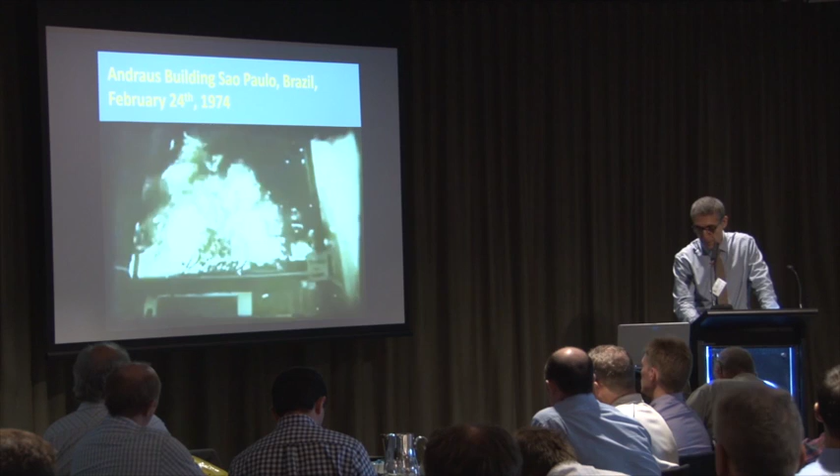So we realized in the 1960s, basically as a function of every fire that actually has a name that happened in that period, that this is something that needed to be avoided. The entire strategy to try to guarantee life safety in tall buildings depends on the fact that fires should be contained to a single floor. If we cannot contain a fire to a single floor, then the entire fire safety strategy collapses. From the pressurization of the stairwells, which is a very complex process as was described before, to the structural integrity, everything depends on the fact that we can contain the fire within one floor. So a scenario of this nature is actually completely unacceptable, because it integrally dismantles the fire safety strategy.

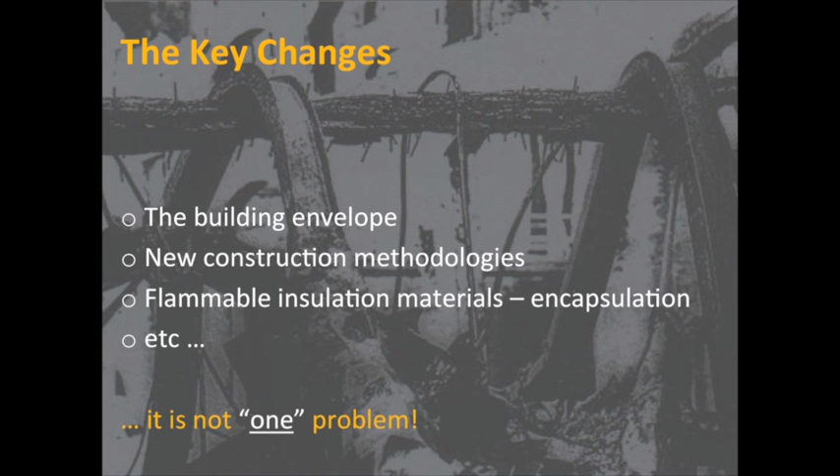So what are the key changes that have brought us into this position? So basically, every time that we've innovated technologically, we're going to introduce risks. Many times those risks are very managed and we understand them very well. But from the inception of modern construction, we've introduced things like what we see in this image.

So basically the introduction of steel into construction resulted in a major problem. The steel actually did not behave as well as timber. So timber became the reference, and we started to try to develop methods to try to make steel as performant as timber. Now, we succeeded at resolving the problem, but that's what it took. We had to study the problem, understood it, and then move on to try to propose solutions.

So what has changed? Basically, our building envelopes have changed dramatically. So we don't have the same type of systems that we had in the 1970s or 1980s. We have introduced all sorts of novel construction methodologies, and we've made all sorts of statements about all this complexity of the structural systems and all the different things that we're putting in place.

Now, we have introduced massive amounts of flammable insulation materials under the name of sustainability or green buildings. So basically, our entire facades are protecting us now from heat transfer. So effectively, we do that by means of the introduction of cellular plastics, and that has forced us to change the paradigm. We're not talking about flammability anymore because the materials are flammable by definition, but we're talking about encapsulation. So we're protecting flammable materials by means of external barriers.

So there's a massive change in paradigm that we really haven't understood very well, and I can keep going, and the list is very long. So there's a number of different things that have happened in the process, and the first thing that we need to recognize is that it's not one problem.

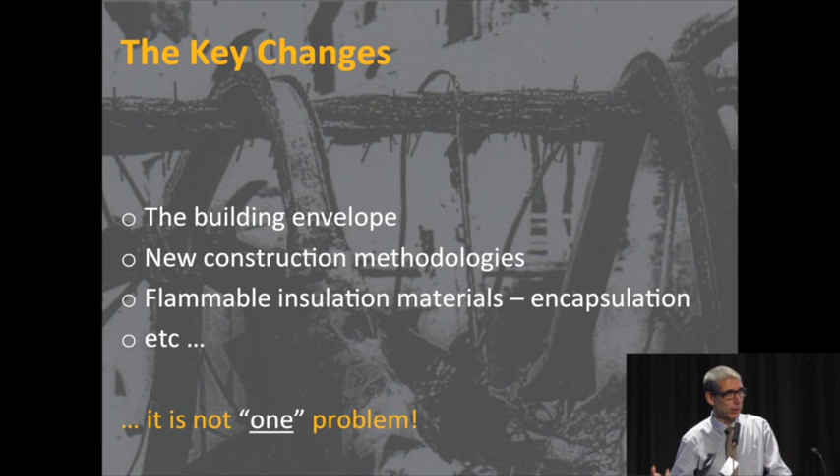All those images that I showed, if you actually analyze the fires, in every single case you get a completely different scenario. So the analysis of these fires shows that what we have is a multiplicity of problems, all embedded in the concept of the modern facade design. So we design facades in a completely different way, and in the process we have introduced a multiplicity of problems, and we cannot box them into one single problem. There's numerous problems that need to be analyzed in great detail.

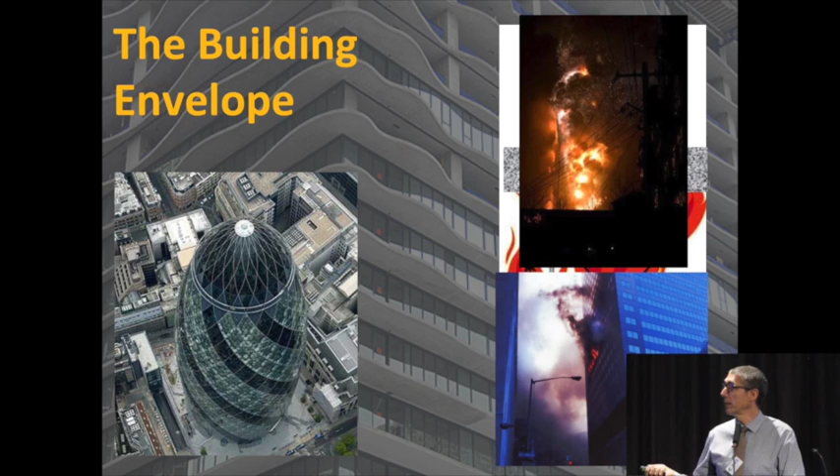So here you have an example of a problem that we have created by transforming components into a system. So now what we have is system behavior, we don't have component behavior. In the past, basically I guarantee geometry, I guarantee flammability by testing components, and I guarantee fire resistance by testing components. Now I need to be able to understand the system in its integrity. And if I don't understand the system behavior, then I won't be able to address this specific problem.

So this is how we went from here, which is a perfectly controlled problem, to here, which is a completely uncontrolled problem. In other words, what we did, we changed the problem.

So the moment that we have a facade of this nature, and I have nothing against Norman Foster, by the way, but I like his buildings, so I put them always as examples. And this is what you're creating. So what you have is a structure that is heavyweight, that is going to heat up very slowly, and it's going to deform in a very peculiar way. That's the concrete slab. Then you have a lightweight system that is going to deform in a completely different way, and then you have a connecting point.

That connecting point is going to result in, basically, in the presence of a fire, we're going to try to block this by introducing some sort of a barrier. But the truth of the matter is that if I put a fire, what I get is relative displacement. So this is going to rotate in a certain way due to temperature gradients that are produced in the concrete slab. This is going to rotate in a completely different way because it's going to be restrained thermal expansion due to simply dilatation of the steel or whatever the material is. And the result is that you get two systems that are displacing themselves in a completely different way. The result is the production of a gap.

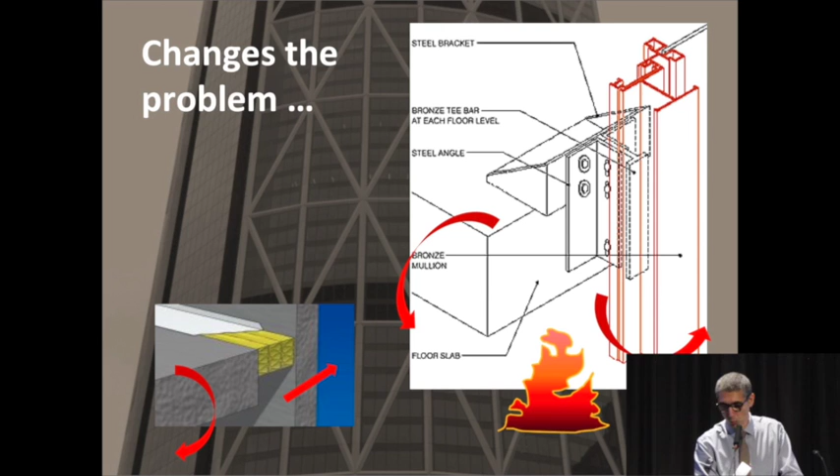Now, how do I fix that problem? Okay, and this is not the way in which we fix the problem. Now, detailing becomes very important. Detailing, quality of workmanship becomes very important, but also integrated design becomes very important because it's now the structure plus the facade that matter. Now, if you look at this picture here, this picture is one of those pictures of a problem that cannot be solved. You have the two connecting elements, you have the very lightweight system, you have the concrete slab, and the concrete slab lands on the glass. So how are you going to fix that problem? Once you created that system, then you cannot fix it anymore.

Now, how did we land in that position? The facade designer designed the facade, the structural engineer designed the structure, and nobody worked on the system as an integrity. Then we tried to fix it by filling the holes with whatever we want, but there is no way you can guarantee continuity when you have that type of a system. So filling the opening is really not the solution because relative displacement will never allow to fill that opening. So effectively, because of poor construction detailing, we have created a problem that cannot be fixed, and this gap can never be resolved.

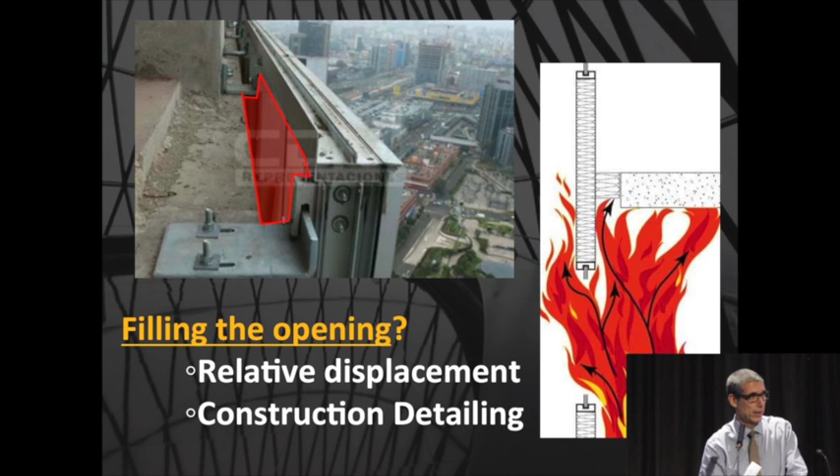So at the end of the day, what we're talking about is complex building systems. We're not talking about components. And if we don't really understand these complex building systems, we are going to be always in the situation where we cannot fix the problem. Now, the complex building systems introduce an enormous amount of detailing. So we have all sorts of different components that go into the systems, and they're getting more and more complicated because we're putting more and more demands on the systems. Now, the complex building systems are multi-purpose. We want them for energy conservation, stability, durability, comfort, life cycle, you name it. We've created all sorts of different requirements for those systems.

Now, those systems are going to be more and more dependent on labor skill and on cost. There's a lot of tolerance issues, installation issues, times, because we want them fast. They all have to come up really, really rapidly. We have all sorts of modifications that are done during construction, and all these things are affecting the performance of the system itself. None of these things were taken into consideration. The objective at the end is to guarantee that encapsulation. This is the problem that needs to be solved, because we are putting flammable materials in the systems, and therefore we need to encapsulate it.

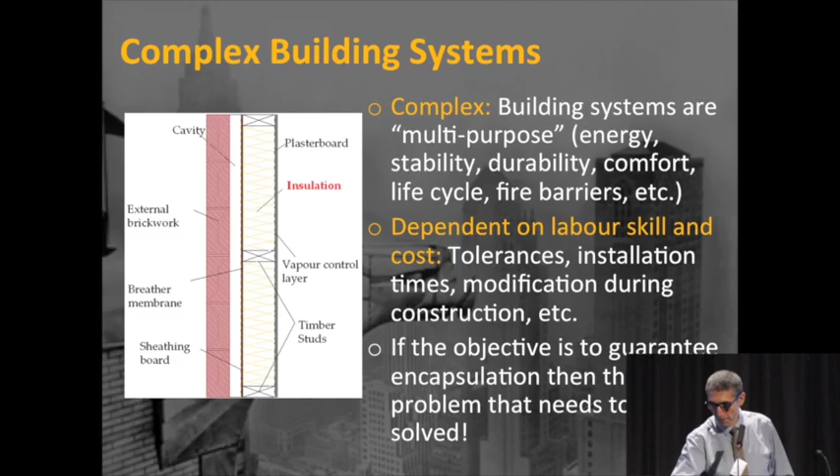So let me give you the example of the kinds of things that we are encapsulating and the kinds of problems that we're generating. So if you look at these two images here, I'm going to show you two videos. One of them is the typical two aluminum plates with polyethylene in the middle. That's everywhere. So today we have all these facade systems that have these two aluminum plates, and you have a plastic in between. Okay, why do we put the plastic? For a number of different reasons, from minimizing vibrations to insulation issues.

So now, what happens when we start heating this up? What is the failure mode? The failure mode is the two aluminum plates, and then you have in the middle this plastic, and as you start heating up, you're going to realize that the way this fails is not because you're igniting the plastic, but because the adhesive between the two of them fails, and then it splits.

So the moment that you have thermal expansion of the aluminum plate in the front, and that it cannot be absorbed by the cold back, then you get relative displacements, the adhesive fails, then you get a split. The moment that the split happens, what ends up happening is that then it starts gasifying, and then the result is that it ignites. Now, it's going to take a little while.

You can see how it's beginning to split now here, and the moment it starts splitting, you can see the smoke being produced, and then all of a sudden, you get the ignition of the material. You see how it's splitting? So once the material ignites, then it just goes. Now the concept of preventing upward flame spread disappears completely, and all of a sudden you have flames that are coming up from the outside.

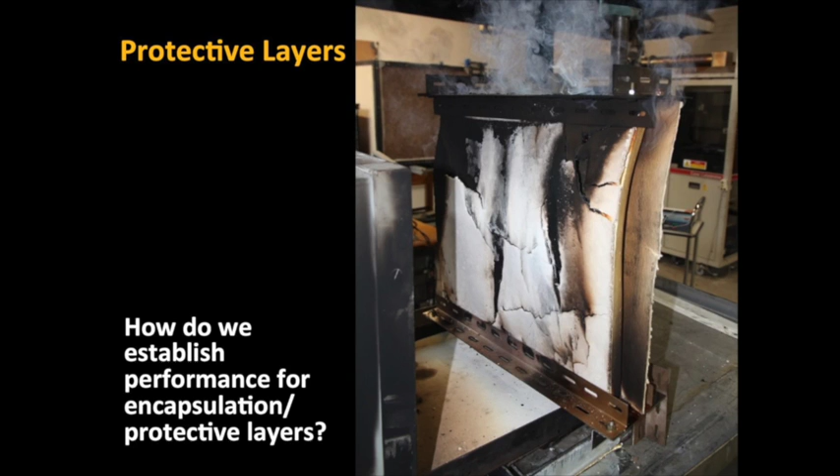Now, as you can see, we've created all these problems, and we understand what the problems are. We encapsulated these materials because we know they are flammable. There's no way to circumvent them. That's why we encapsulate them. So we've created systems that are quite complex in nature, and to be able to fix the problem, you need to be able to test the problem that you're trying to solve. Instead, what are we doing? All over the world, we have flammability tests. So all our materials that go into facade designs have to meet these flammability requirements.

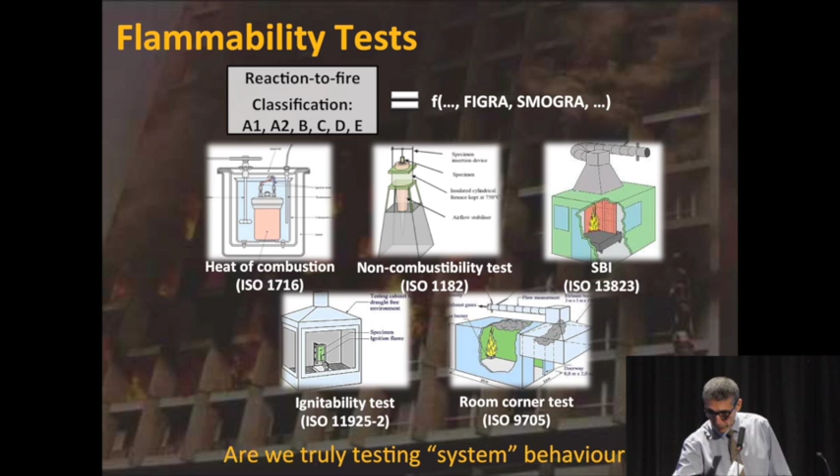Needless to say, if I utilize EPS, or I utilize polyurethane, or I'm going to use, for example, polyethylene, they're going to fail. That's why I encapsulate them. So why am I testing them for flammability, if at the end of the day I know they're going to burn? Nevertheless, that's what we do. So we comfort ourselves and feel very happy because we've tested them for flammability. Okay? Then some people are a little bit more progressive, and they move along and they say, well, let's do fire resistance.

Fire resistance is to test the resistance of a non-flammable material to the impingement of a flame to establish a barrier. These things are not a barrier. So then we say, oh, let's just require fire resistance ratings. Let's put FRLs. And we test them against fire resistance. Needless to say, they're going to fail. They're not designed for it. So then we say, oh, well, no, let's just not do fire resistance anymore. Let's move somewhere else. Okay, and then we go to other different things.

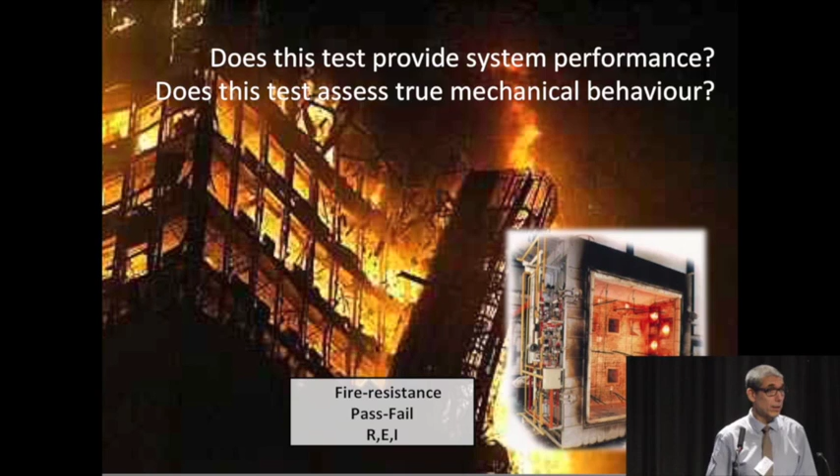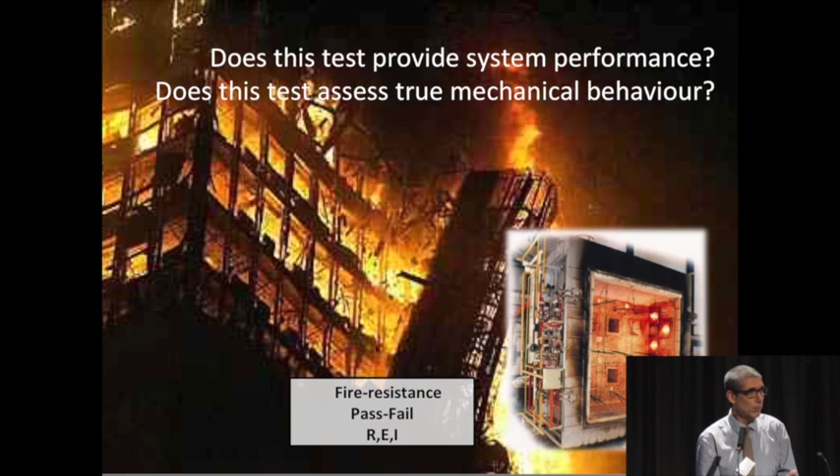Because these tests, we realize, are not there to test the system performance. They're not there to test mechanical behavior. They're there to test a barrier. Now, when we had a concrete slab that served as a barrier, that made sense. But now that we have a connecting point and we have a complex system, it doesn't make sense anymore. Nevertheless, we keep doing it. Now, when we finally realize that none of these things work, then we say, let's do scenario tests. So do we test for fire for one fire condition?

There you go, one fire condition. Do we test for fire without putting any instrumentation? There you go, no instrumentation. But we're happy now because we're testing against one scenario. If I'm a manufacturer of a facade system, I'll be very happy because I have a very easy target. Does that fix the problem? Not really. So that's what we're doing today.

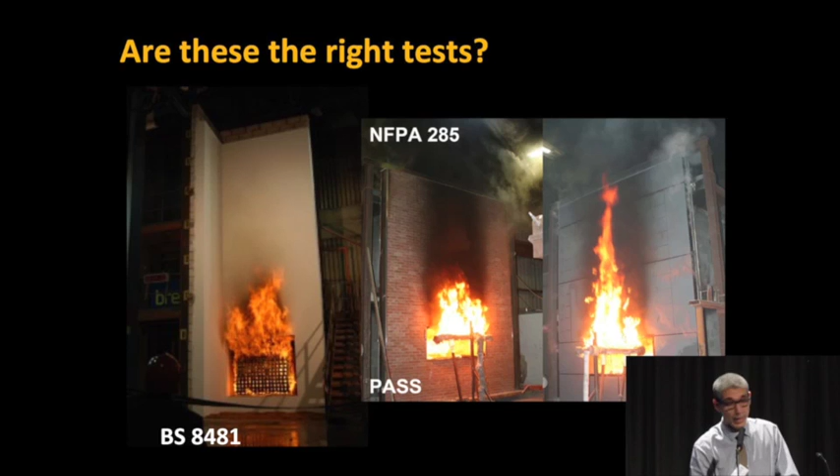We have all these tests, but we never ask ourselves the question if these are the right tests. And the problem is that nowadays, we started here and we've lost this completely. So we have to start thinking on what is the solution. Now, the problem is that the solution is truly adequate testing. And adequate testing, we do know how to do it. We know it perfectly well. Okay? So we know exactly what needs to be done, but it requires bespoke testing that is basically for each particular system. It's not a standard test.

Each system is a system of multiple components that requires a testing methodology that is directed to solve the problem, just like you do with a wind tunnel. Okay? But we're not willing to do it when it comes to fire because we're not willing to address the system behavior. We want a standard test. We want something that is good for flammability, that is good for fire resistance, but is not good for a system behavior. Okay? So at the end, we need to be able to address building plus envelope, and that requires bespoke testing for each particular system.

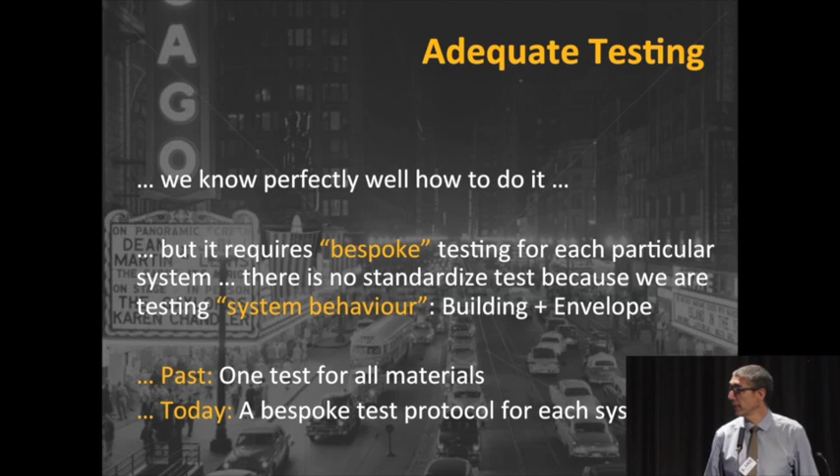So we need a testing methodology. So if we really think about it, the past is one test for all materials. What we want is a bespoke methodology for each system. Okay? That is going to cost more? Of course it's going to cost more. But if what you really need to do is fix the problem, then that's what is necessary. So today, this is what we need, bespoke test protocol for each system.

Now, at the end, let me ask you the question. So if you want to use encapsulated EPS, do we know how to fix the problem? Yes, we do. But it really takes a lot of effort. Because the problem with EPS is that EPS melts at a very low temperature, so it starts retracting. So your protective layer loses its structural integrity because it has no support. Okay? So we need to design in a way such that we prevent that melting.

Now for that we need to try to understand the different forms of EPS and see at what temperature it degrades in such a way that I understand how to prevent that from happening. Then I need to provide systematic testing by which I expose the different types of barriers to an array of different conditions, not a single scenario test. Once I understood this, then I can start looking into the potential fire scenarios and see where is the match, and then reproduce with large-scale testing those scenarios until I actually get what I want. Those tests have to be properly instrumented, and they will serve as validation for the whole methodology.

So, can it be done? Of course it can be done, but it takes a lot of effort to do it. Now, the question is, if we want EPS encapsulated in our facades, then yes, we can do it, but this is how far we have to go. Now, if you want to ignore that and just basically use EPS without really thinking about it, then we're going to continue to have these facade fires inevitably. There's no way to prevent it.

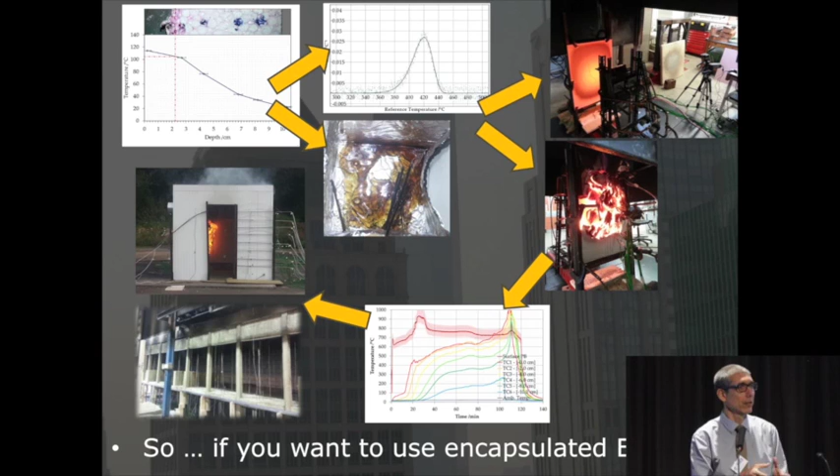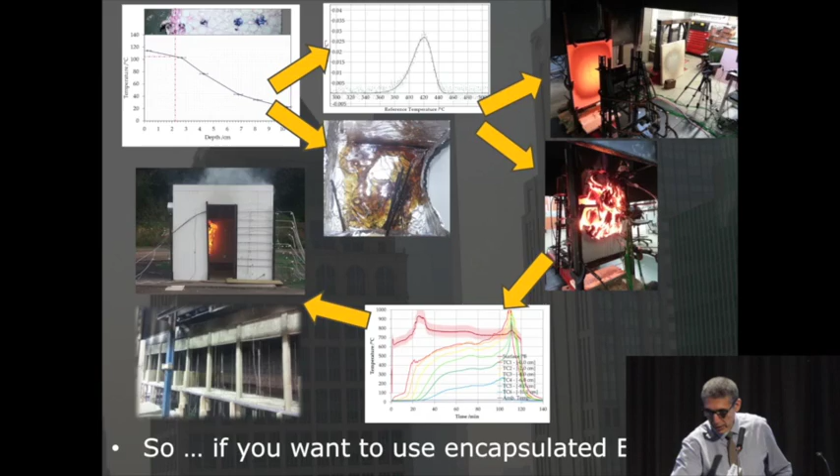Okay? So, do we know how to do it? Yes, we do. Okay? We have the methods, we have the understanding, we have the instrumentation, we know exactly what needs to be done. The problem is that that requires to change the way in which we think. We don't have standard tests for this type of problems. What we have to have is a bespoke methodology that enables us to resolve the problem that is at hand. So what seems to be a very viable technical proposition is truly an enormous philosophical drift. And that's the problem that we have today with facades.

The reason why we have so many of these facade fires and the reason why we're going to have still so many of these facade fires is because we have not made that philosophical departure to try to think of this problem in a different way. It's not a material problem, it is a system problem. And until we accept the fact that we're dealing now with systems, we're not going to be able to solve this problem. Thank you.